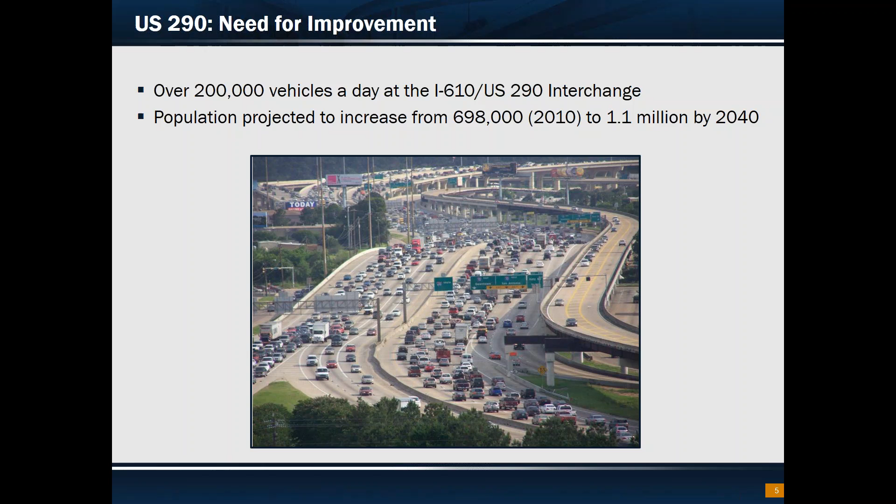And in 2010, we were awarded the Record of Decision, which is the environmental approval to proceed with construction. This next slide, wrong way. This next slide shows you the ultimate vision that we are working for on the 290 corridor.

The solution that was recommended and approved through the environmental process is to expand and widen Highway 290 to 6 lanes in each direction. And then in addition, to add a new location facility, a managed lane facility along Hempstead Road, which parallels 290, that would also add 2 lanes in each direction.

There was also the recognition that we needed a multimodal solution here. And so TxDOT, as we went through the environmental process, provided for environmental clearance of a 50-foot reserve for high capacity transit. Now, this was a regional solution that was agreed to by multiple partners within the region, and essentially TxDOT had ownership of the 290 solution for constructing the 290 widening. The local toll road partner assumed ownership of the Hempstead Tollway and for shepherding that through the process.

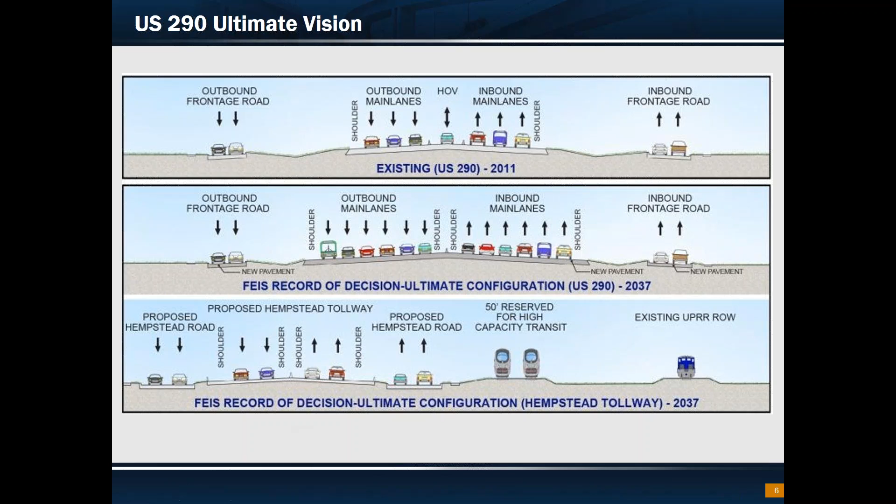To give you an overview as to what the program management scope was and what the HMTV team performed as the extension of staff, there were 5 primary elements that were involved in the work that we supported TxDOT for. The first one is design. There were 8 section design consultants that were brought on board to support the PS&E development of the 290 corridor. In addition, there were 5 TxDOT in-house design teams that helped to provide design support and provided 5 of the design contracts that went to construction. The PMC provided design oversight and coordination with all 13 of those teams.

In addition, we provided environmental support through the multiple reevaluations that happened through this process. Additionally, we provided program management services to include financial reporting, cost estimating, and the associated activities with that. Now, with the 38-mile corridor that we underwent along 290, that required 375 right-of-way parcels to be acquired. So we also supported the right-of-way acquisition process to include appraisals, negotiations, eminent domain support to include expert witness, and relocation support.

On the utility side, we coordinated more than 130 utility agreements in support of more than 600 utility relocations along the corridor. That included engagement with City of Houston, City of Jersey Village, the various MUDs along the corridor, CenterPoint Gas, CenterPoint Power, 12 telephone, cable, and internet companies, and 14 pipeline companies. We also continued post-design through the construction phase services, and I have another slide that provides more information on that, so I'm not going to give too much information here.

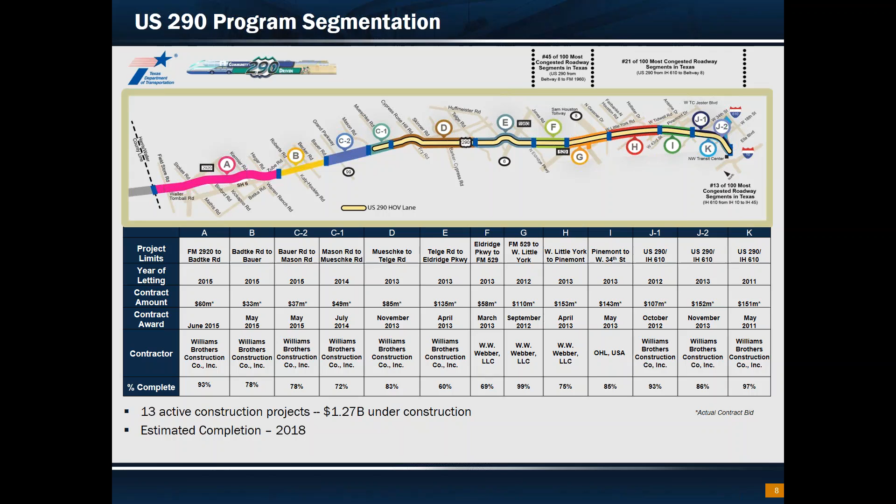And that was a $4.7 billion solution, with about $2.5 billion of that assigned to TxDOT and a little over $2 billion to the toll road authority. And they had a 25-year implementation plan for that, which is the 2037 that you see on there.

In the early 2012 time frame, the state and the local toll road authority worked together and realized that if they pooled their limited funding that they had available at that time, they could provide traffic solutions to the public in a much improved fashion or a much faster solution than previously. And so they basically collectively worked together and came up with what we call the managed lane solution.

This was not eliminating the Hempstead Toll Road. It was essentially deferring that for later and putting all of the focus on 290. So basically, instead of splitting up the two corridors, one was TxDOT and one was the Toll Road Authority, they both agreed to share the 290 TxDOT right-of-way and pool their resources and make that happen.

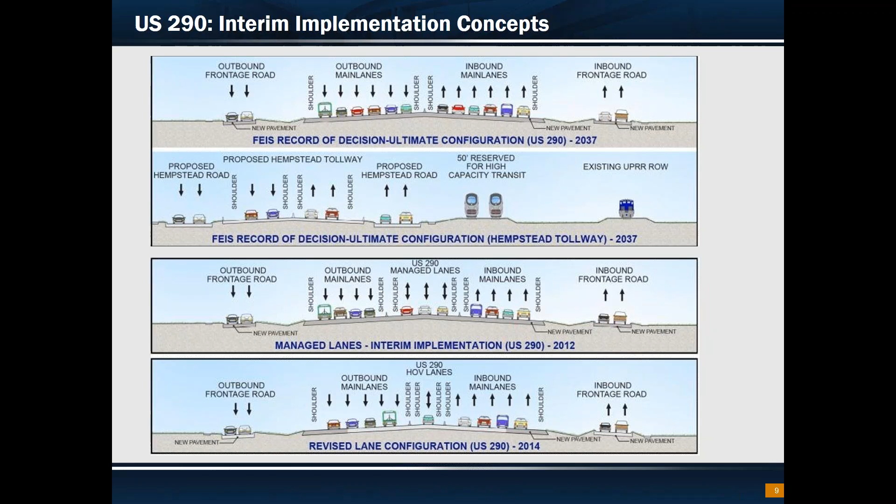So with that, I've talked a little bit about it, but I wanted to highlight some of the challenges that we have faced along the way.

The first one is on the design process, and we have had both ends of the spectrum with budget funding slowdowns and budget accelerations. On the acceleration side, the availability of construction funding meant we had one of our $152 million construction projects that was essentially designed in a little over 100 calendar days. So we have had significant acceleration there.

The lessons learned on both the acceleration and the slowdown is that it's very important to understand your work plan and the critical path items on that work plan, and what you can use to efficiently either move things forward or to prioritize so that you can proceed in a better fashion as you have funding availability.

On the construction side, as we went through, we have had multiple iterations of what we are constructing as we go along. Those have been a lot of lane configurations, and we have tried as much as possible to utilize the same concrete footprint as what we were building and just reconfigure the lane widths, or reconfigure the lanes along that footprint.

So one of our important lessons learned is the importance of a flexible design. You need to be able to leverage the available space to build within previously approved right-of-way as you're making changes, and to minimize the environmental impacts.

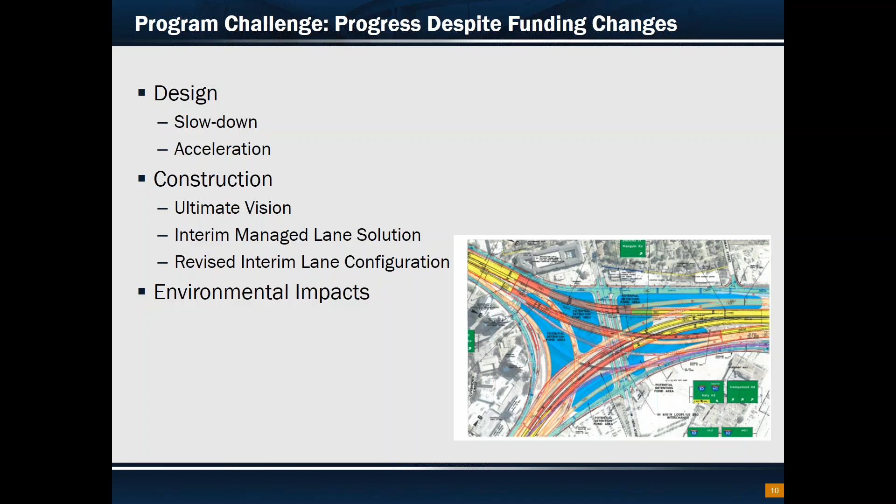The next challenge I want to discuss is managing change during construction. We would all like to live in the perfect world of having your right-of-way acquired before construction started, but based on the availability of construction funding and a few other constraints, we had a significant amount of our construction projects that started construction before right-of-way acquisition was complete. As you know, that impacts both the right-of-way acquisition and the utility relocations that need to be done before you can do your storm sewer construction and everything else.

So in order to mitigate that, we had a couple different priorities. The first one, we prioritized right-of-way acquisition. We looked at our traffic control plan and determined which were the priority parcels, and made sure that was where the focus was as we were planning the efforts.

The second one, we implemented multiple traffic control mitigation strategies, specifically using traffic control workarounds around existing utilities in places where, for example, we had acquired the right-of-way, but the utility, due to their own constraints, hadn't been able to relocate yet. So we were able to do temporary solutions with the storm sewer or traffic control in order to keep the progress moving forward. And the implementation of interim concepts, as I discussed earlier, one of our main priorities was to make sure and avoid rework. So whatever had already been put in the ground for the concrete footprint, we tried to utilize that as much as possible.

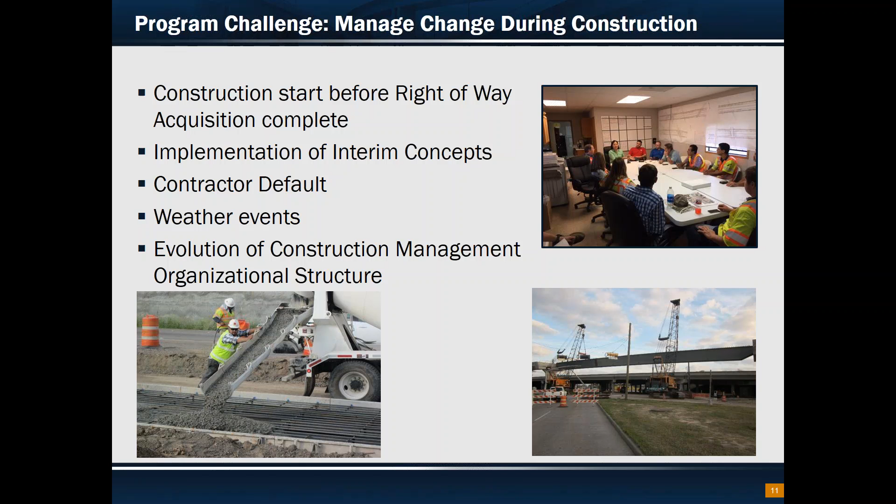The next one, I'm going to turn over to Mike for a couple of these, and he's going to talk about some of the public involvement challenges we faced. Thank you so much, Leanne.

Yes, you'll see we touched on this a little bit earlier, but the importance to TxDOT of a dedicated public information office. This was something that TxDOT used during their last really large project in our area, the Interstate 10 project. It worked very well because there are so many questions - specific, whether it's right of way, whether it's construction, whether it's what are you going to do, where's my entrance, where's my exit. And it helps to have that place where you can go, one-stop shop is the way to describe it. And you see coordinated message between agencies.

That helps as well because we have a lot of partners, as Leanne mentioned, anywhere from the City of Houston, City of Jersey Village, Harris County Toll Road Authority. It's so important to have a unified message. You want to make sure that not only do you have one place to go, but the message that everyone says is the same. That's extremely important. Whether it's folks asking about right-of-way or whether it's a community asking, how wide is the road going to be and where's the exit going to be relocated. It's important to have that one place that everyone knows to go and everyone knows to stay on this message and here's what the message is.

And progression of public concerns - it's really fascinating to go through and see how the calls and the emails and our presentations have changed. At first, when we started acquiring the right-of-way 6, 7 years ago, it was, hey, am I impacted? How much? What's the process? What am I going to do? Why do you need this? Right-of-way was an enormous question, really before construction began.

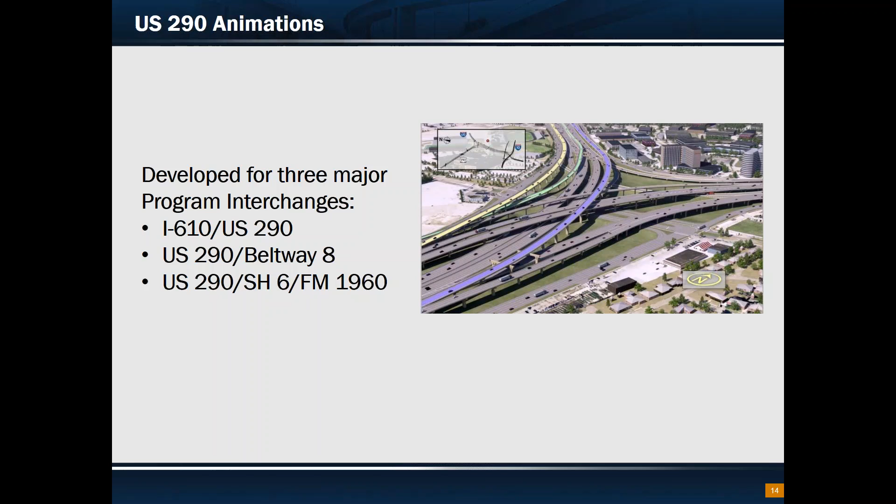Animations - these were developed for our 3 major interchanges: 610 to 290, 290 and Beltway 8, and 290, Highway 6, and FM 1960. If a picture's worth 1,000 words, an animation's worth 100,000.

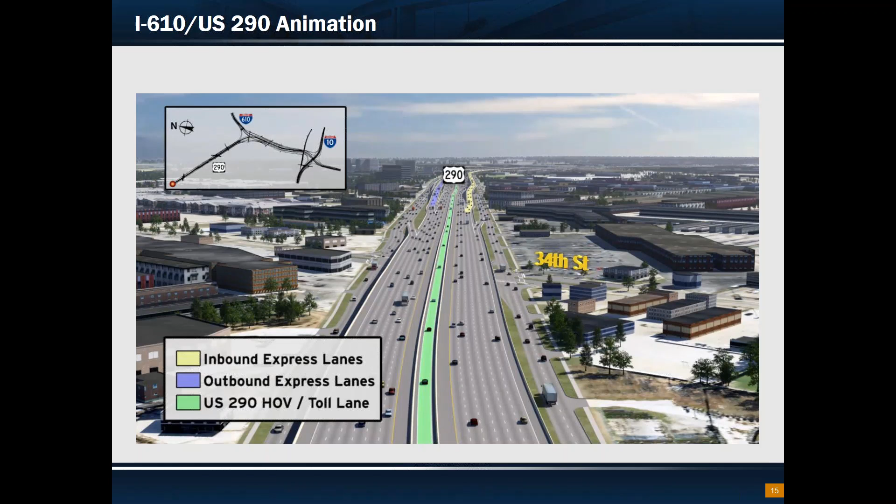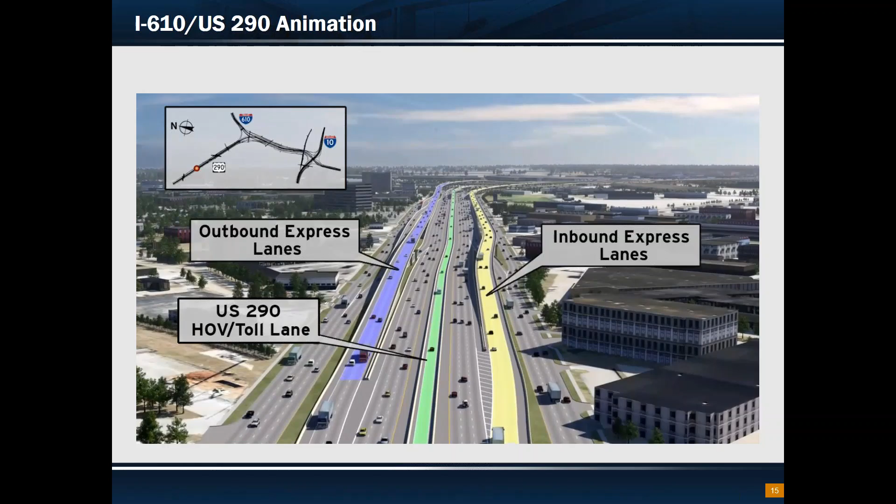Here is 610 - this is where real construction happened, we apologize for this, it's a disclaimer we need to put up here. Construction began here in June of 2011. This is coming from 290, I'm on the west, coming inbound toward downtown, toward 610. You can see the main lanes are in gray, and we use color - the HOV is in green, and there are ramps connecting 290 and nearby Interstate 10, called express lanes. The one from 290 to 10 is in yellow, the one from 10 to 290 is in blue. Most of the work at this interchange is done.

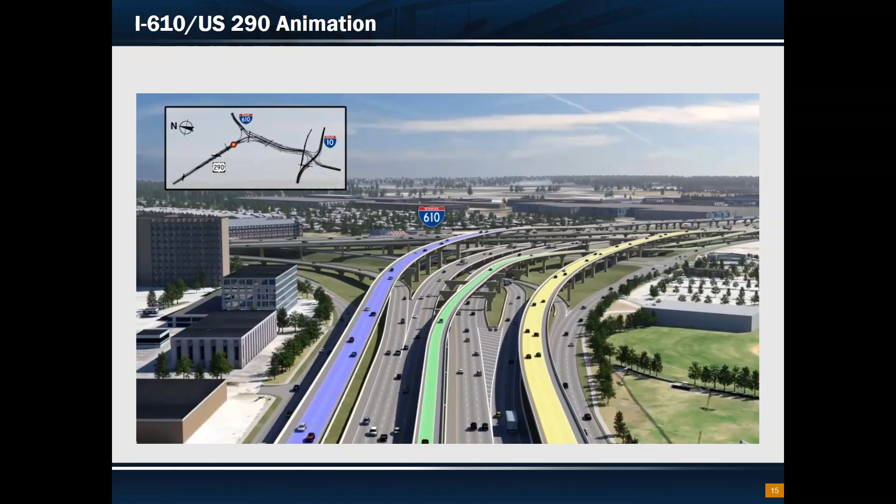Those direct connectors, this is from a public meeting. This is one of the things that folks could really latch onto, because in the past, before those were made, people coming on 290, coming on to 610, if you wanted to go south on 610 or you wanted to go on I-10, you had to share the same gray space here that you see at the top and to the right.

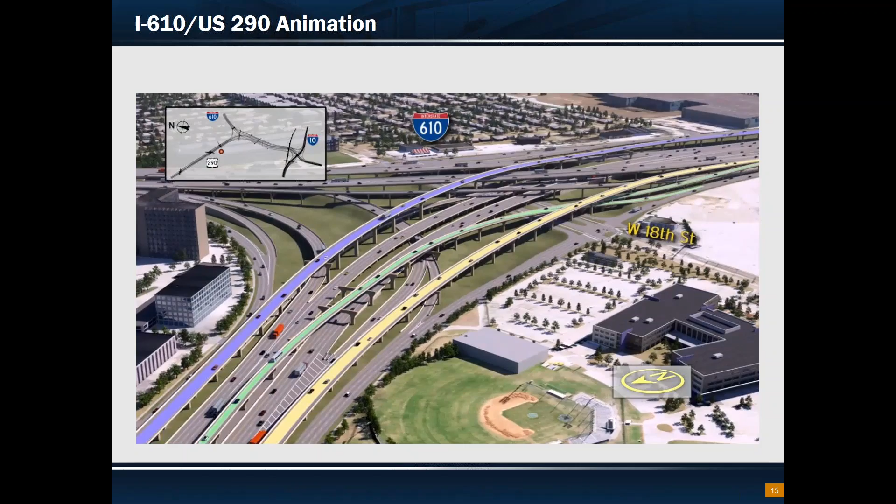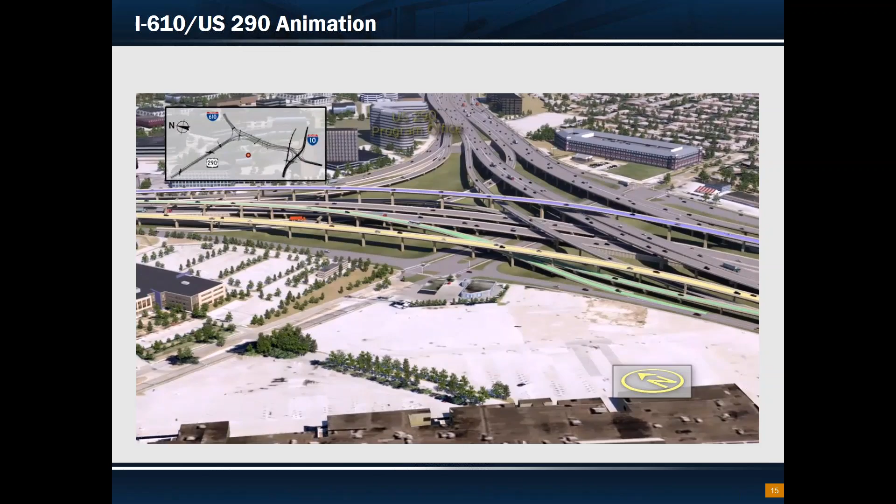But with that yellow ramp and with that purplish blue ramp, now you have your own lane. You have your own roadway to do this. No longer are you having to share space when somebody wants to go to the right or the left and vice versa. You're on your own ramp. It improves mobility, and we feel it enhances safety here as well.

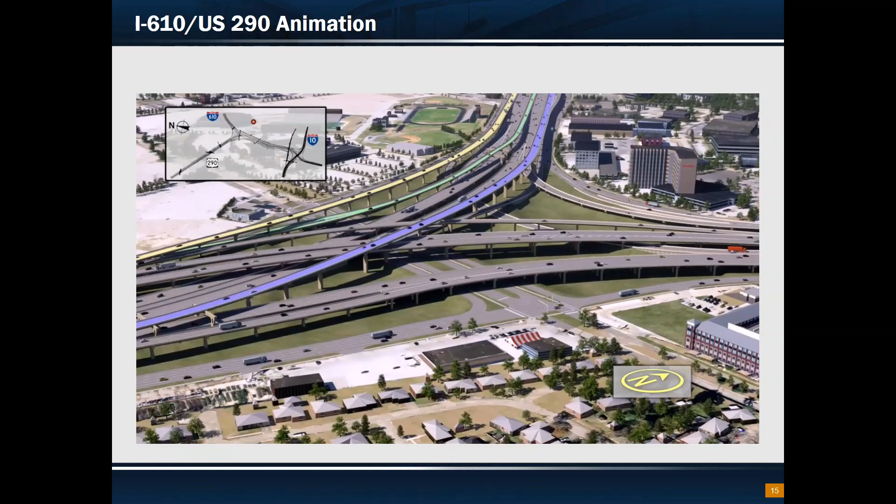There's the HOV you see in green. There's an exit there that allows you to leave here, a road called West 18th. And it's important also, you see we've got landmarks. You can even see Whataburger down at the bottom. That's 18th Street. People left, they were like, oh, now I know where I am.

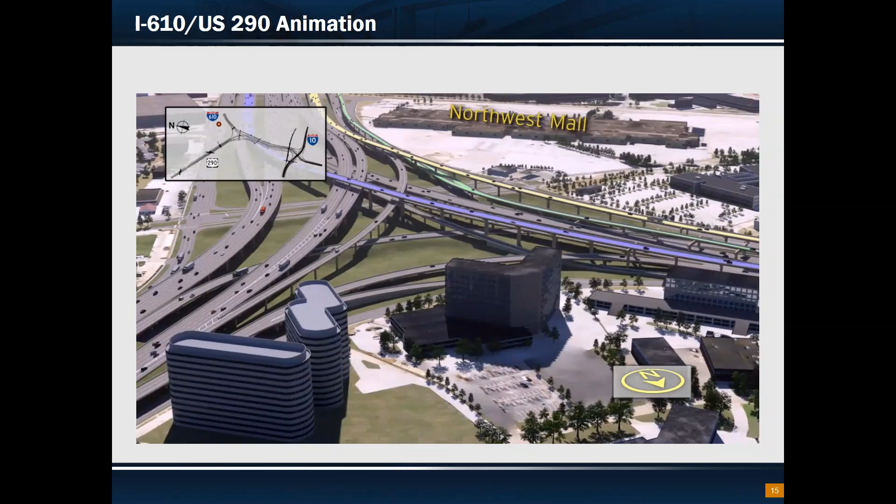HISD, the Houston Independent School District, has their main building right here. There's a Sheraton Hotel up there, and then our building is right here down at the bottom. Those gray buildings you see, that's where we are. There's Northwest Mall. We also like to give that 360 spin so you can get not just one view, but several. And these animations honestly are worth their weight in gold.

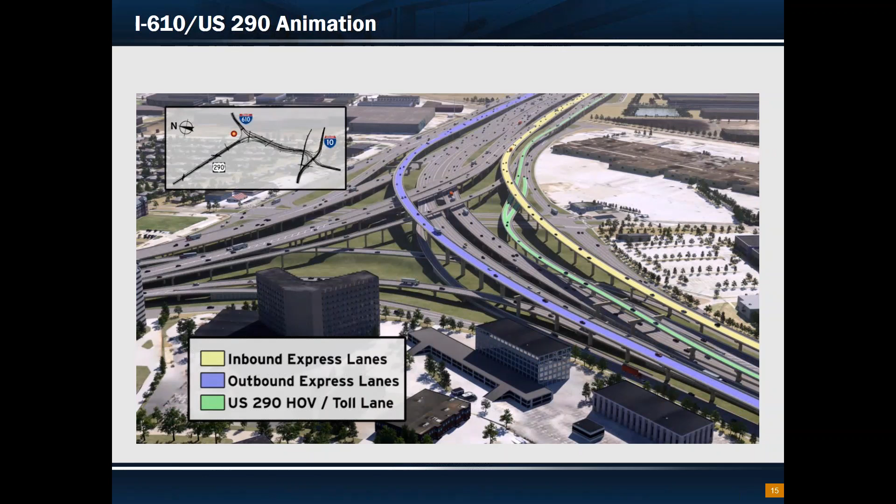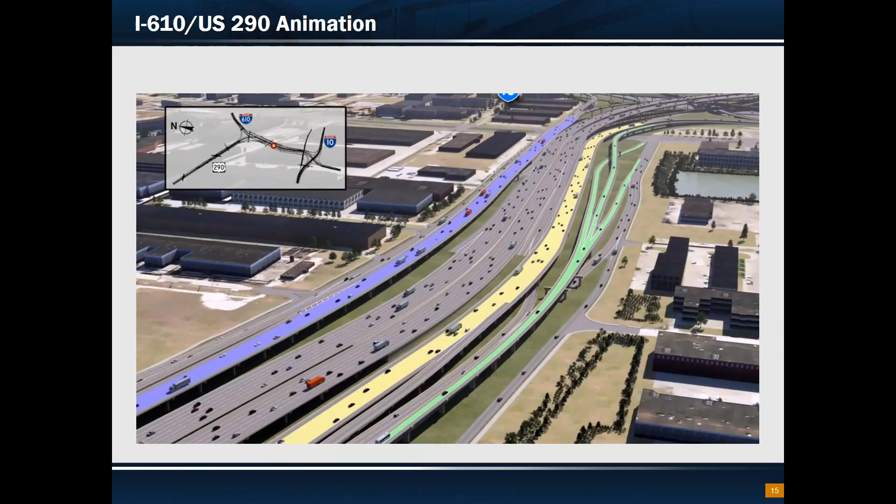And this is a shot from our building, really where we are, looking south. And there are those lanes again. There's the yellow lane that takes you to I-10 from 290, and the blue lane that takes you to 290 from I-10. There's the HOV as it goes into Metro's Northwest Transit Center. Metro is our transit agency, and you see I-10 at the bottom.

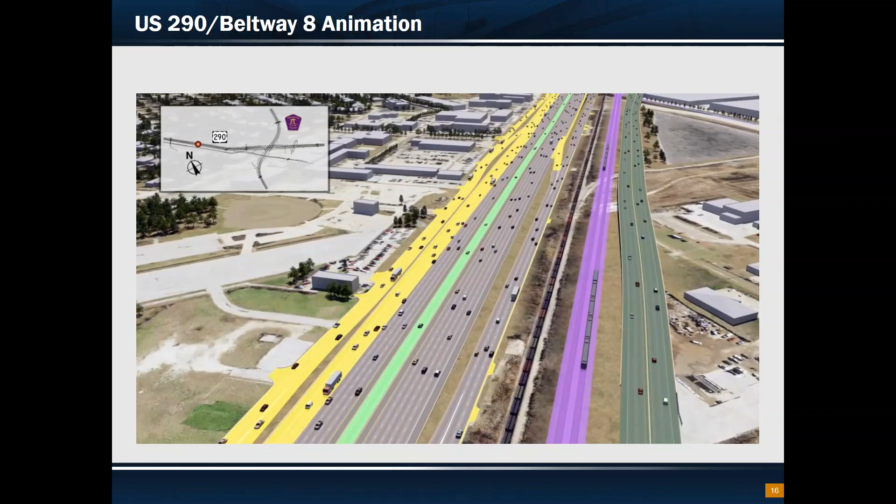There you can see Union Pacific. These animations, I don't know how they put this together, but I'm really glad they do, because it makes our lives a lot easier. Not only are the main lanes widened here, you can see the yellow and the gray, but also you'll see the orange coming up here on the right. Those are what we call collector distributors. And this is the main feature here that was different. The collector distributor allows traffic to enter and exit from them instead of right in the middle of the main lanes.

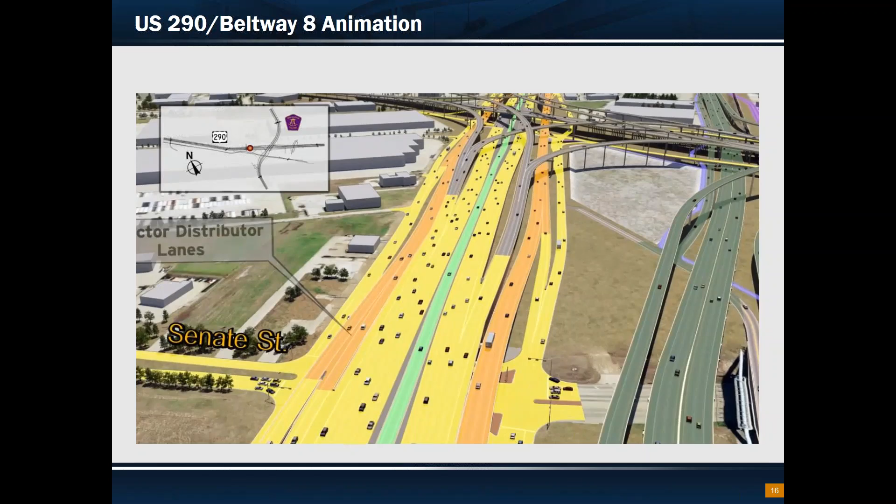And so you've got folks who enter coming inbound onto the orange, and they ride the collector distributor past all the spaghetti at the interchange and enter afterwards. Same thing for people who are exiting, going the other way. The idea is to reduce the congestion; you used to enter and exit on both sides of 290 right at Beltway 8. It made things a bit difficult, and the growth out here is unbelievable. We love the fact that people want to come to our area, but we've got to make sure we can move them around.

And here, this is just another 360 picture of the interchange. I want to point out that you're seeing the gray connectors between 290 and Beltway 8. Those, for the most part, didn't have to be reconstructed. That helped us a lot. On Interstate 10 and Beltway 8, they did have to do that, and that was a big challenge on that project. But here, as we continue to move around, you can see the collector distributors in orange, and there are frontage roads. And there's the tollway shown.

We're looking now from north looking south. And you can see these big buildings here to the bottom right. Those are large warehouse buildings.

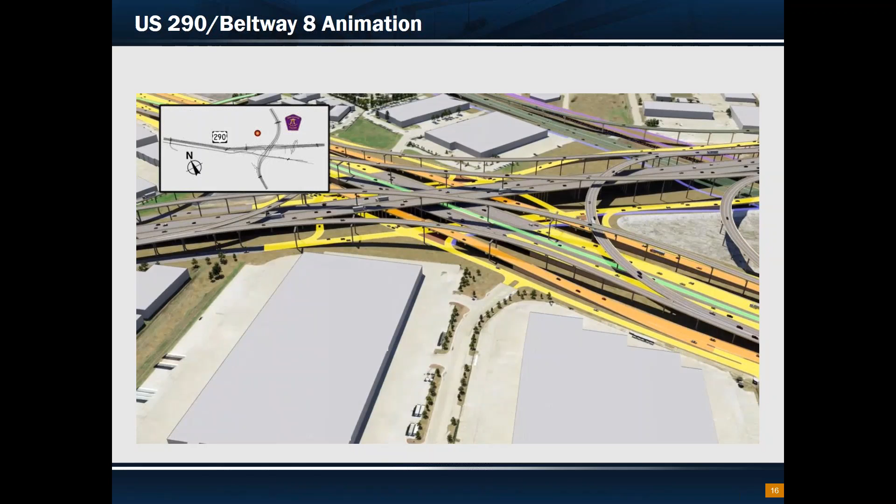Again, it's important to show these landmarks to folks so they can kind of latch onto it and understand, okay, this is where I am, and this is what I'm looking at. This project, this is in what we call Project G, Segment 6. There are numbers internally and letters externally. This is just about done.

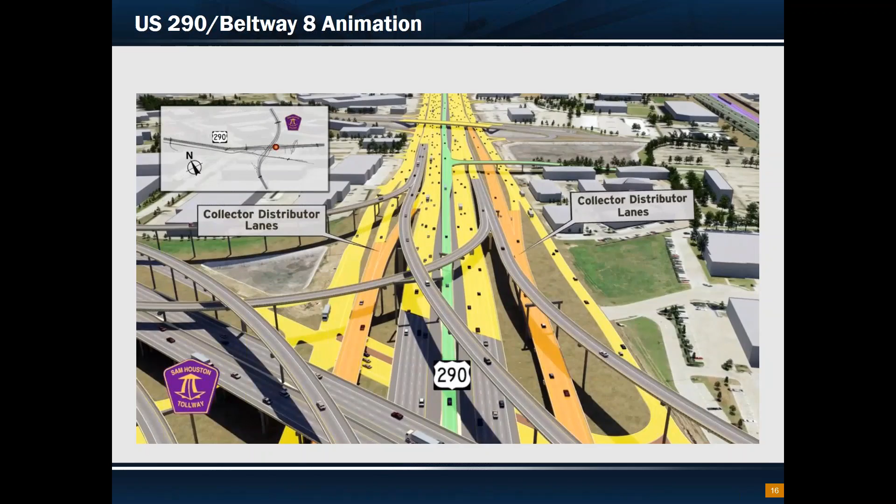And here we are coming in. There's the green HOV again. This is important. You can see where one, the collector distributor on the left, that's the outbound where it begins, and then also you see where the one inbound ends. And we show access to a Metro park and ride. And then West Little York was a bridge that was one of the first things that was constructed.

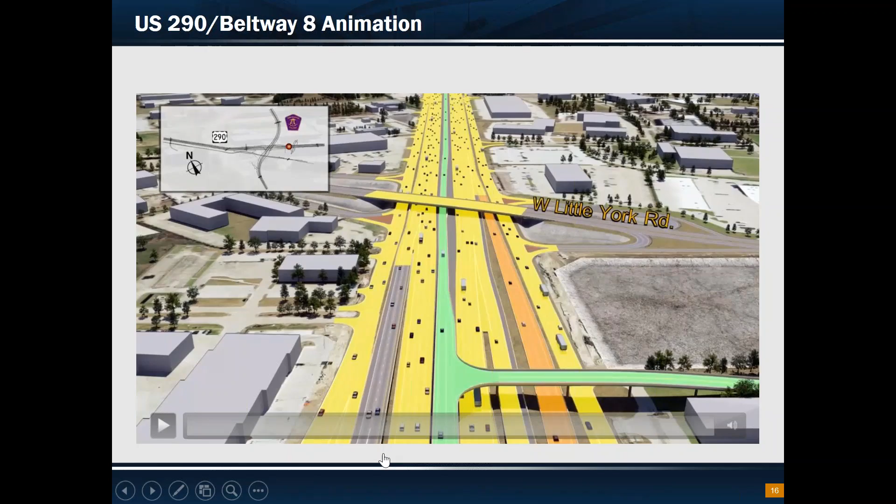This is our latest one. We were very, very proud of this one. We had information meetings in this area because there's a lot of change. The 290 Highway 6 1960 area is about 14 to 15 miles from where our program office is, going out to the west. So you're starting to get into not the newest suburban area, but certainly newer than where we are, or even where Beltway 8 is.

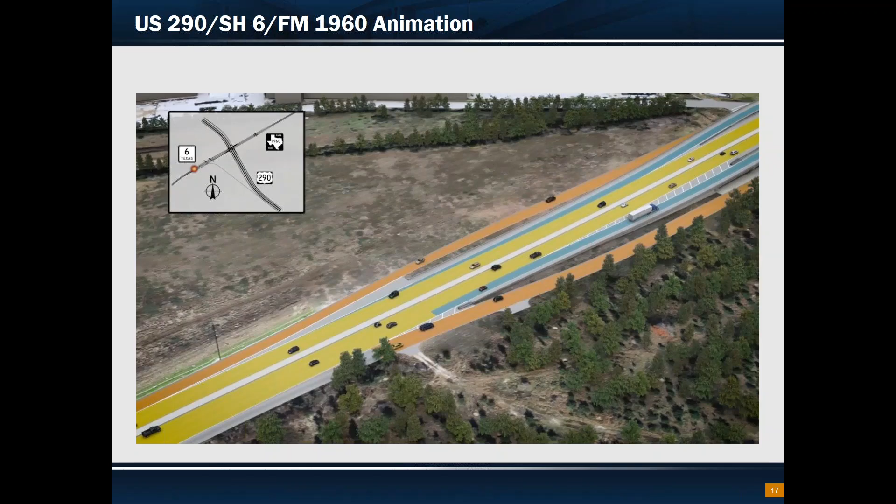And this is from, we have two views. This is Highway 6 going north. Colors are important. The new bridge is much bigger than the one there today. That's in yellow, and that's going to let people just travel through if they want to. What you see in blue will let them go from northbound Highway 6 to inbound 290. The goal of both of those is to keep people away from the very, very congested signals. It is so congested in this area in the morning and the evening.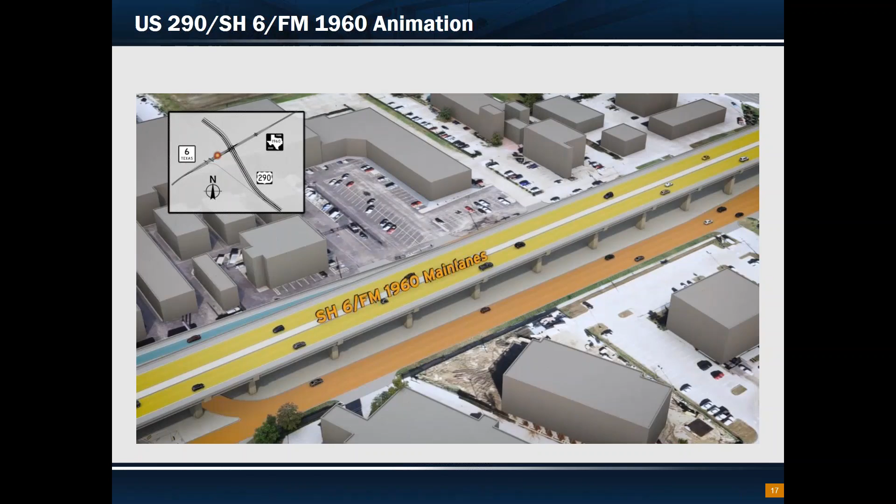And so then you also see the orange frontage roads. Business owners in the area said, how are folks going to get to me if you're building this new bridge? And this shows you. It's 3 levels: the frontage road, at-grade access to the businesses, 290 is the second level, the widened main lanes, and there's that new bridge on top. And you can still see the frontage road. It is on the other side. It's difficult to see here.

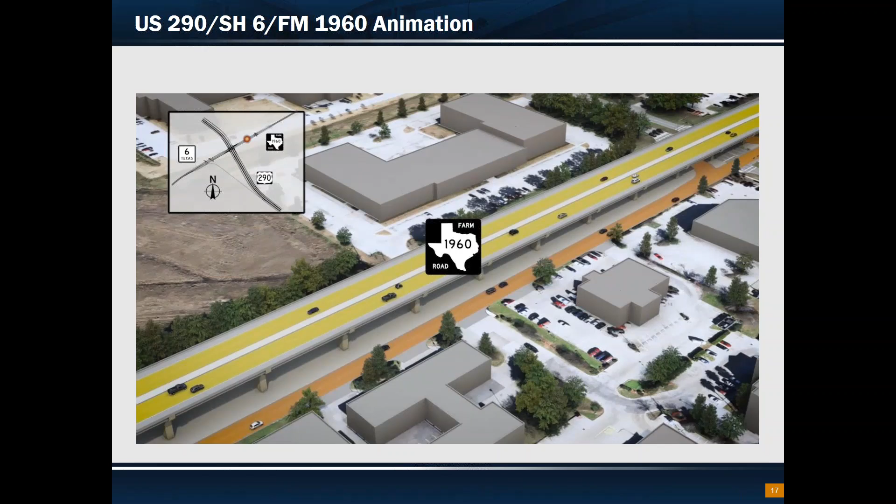And the road changes names to 1960 north of 290. But you can see the frontage road, at-grade access to the businesses. If all I want to do is access these businesses, I can do so. The people who are on the bridge aren't in my way anymore. They can just go right on through without having to go through lights at 290 and a road you just saw called Wortham.

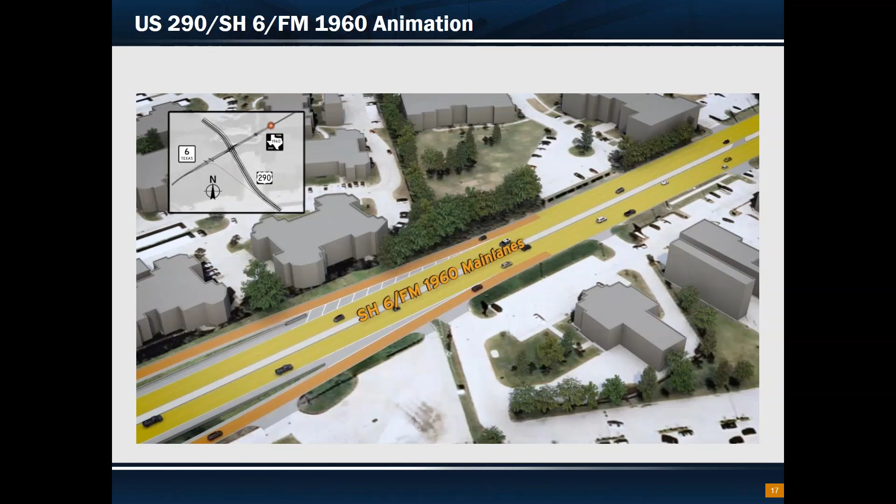Now the video shows everything meeting up. The bridge comes back down to grade, the frontage road meets up with them before a major street called Eldridge Parkway. We had so many people wanting to know what the bridge is going to look like because they just couldn't see it. It's hard to visualize what's not there. And this animation really helps.

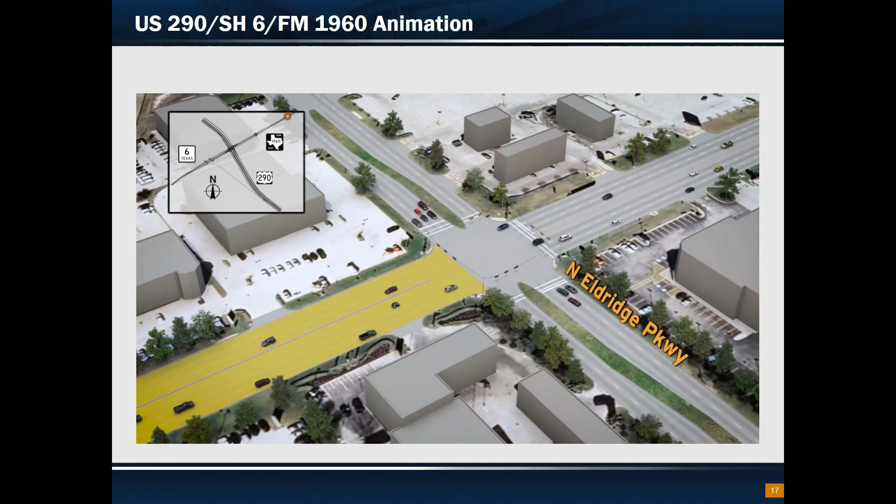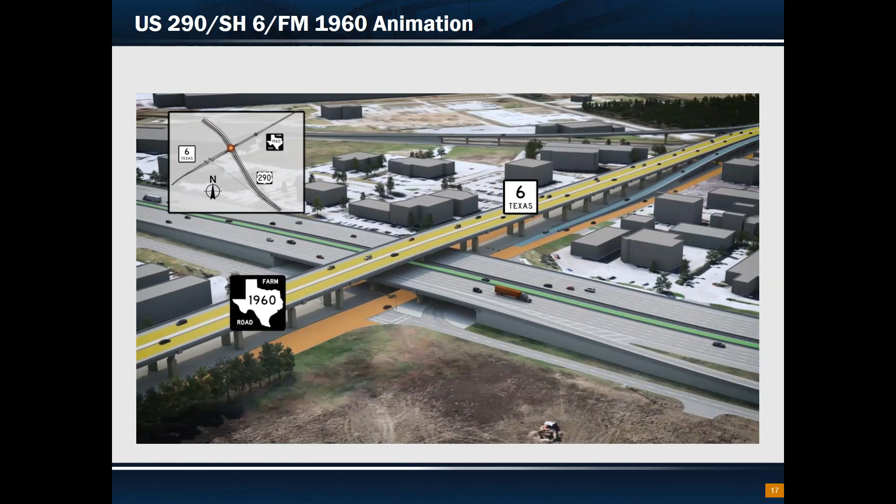This next part is on 290. This is from the west going into town. As you can see again, there's that bridge up on top, level 3, the 290 main lanes, level 2, in gray, there's the HOV again, and then you've got the frontage roads again. What's important also to see here, you can see at the top right, there's a blue bridge structure. That's for the 290 folks. When they're coming inbound or outbound in the evening and they want to go south, they have to have a bridge structure too.

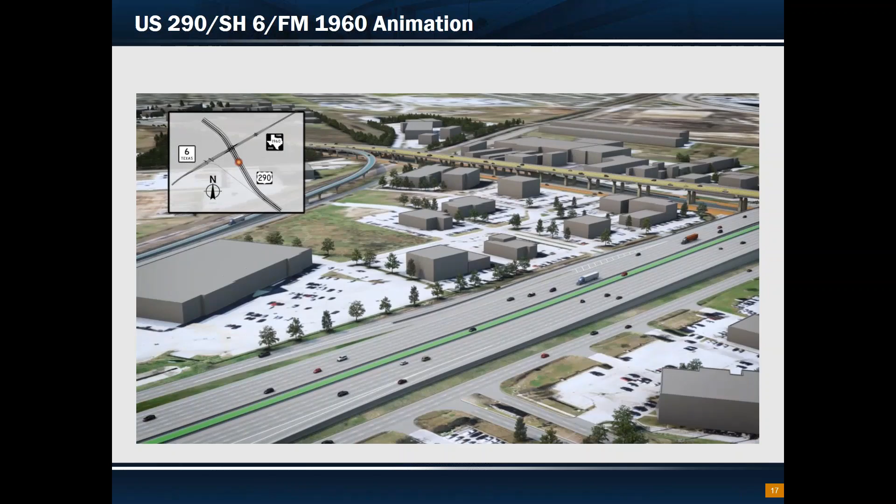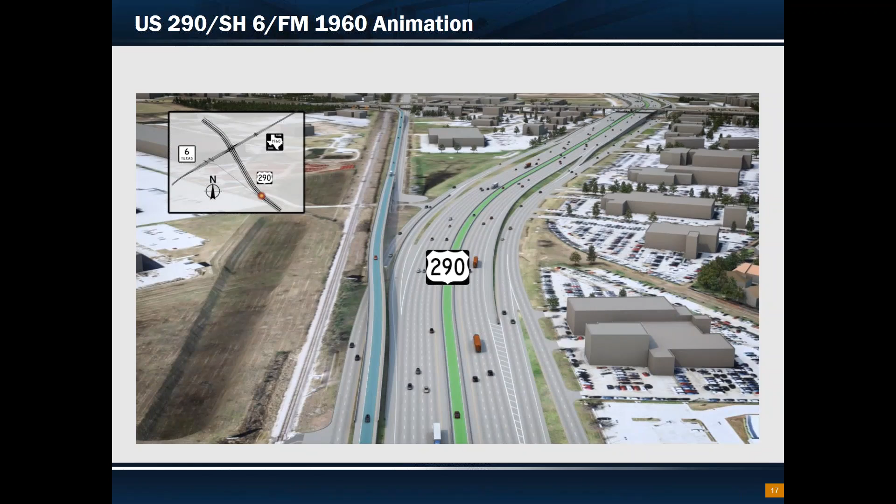Here's the 360, kind of the spin effect again. And you're seeing also here, just to the left, there's that direct ramp from Highway 6 north to 290 inbound. This animation has just answered so many questions. We had this running on 2 screens back January 18th. People saw it, they understood it. It helped so much to have this tool there. I cannot tell you how much I appreciate those folks who put these things together because they are fantastic.